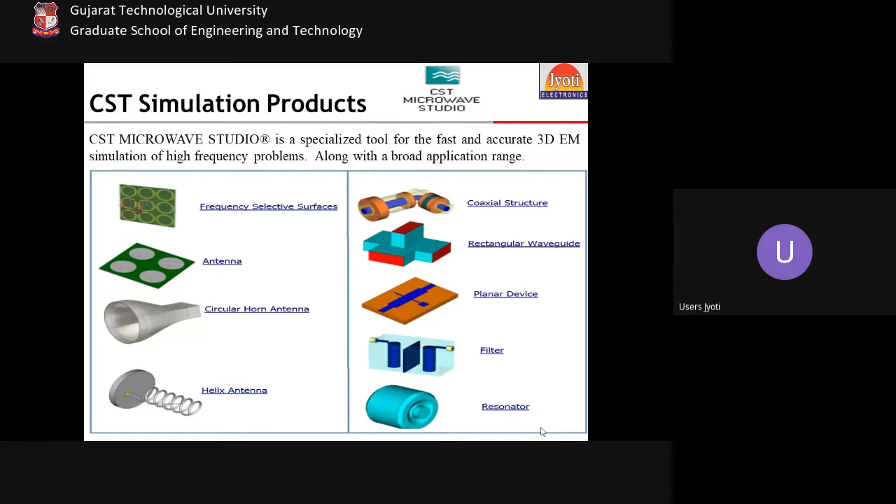So a few of the examples on the screen are designed using CST Microwave Studio. Any sort of metamaterial or frequency selective surface structures can be designed. Any sort of antennas or their arrays can be designed, either planar or non-planar. Any sort of filters, either planar or cavity-based structures, can be designed here in CST Microwave Studio. Thereafter, a few examples in terms of CST EM Studio are on the screen.

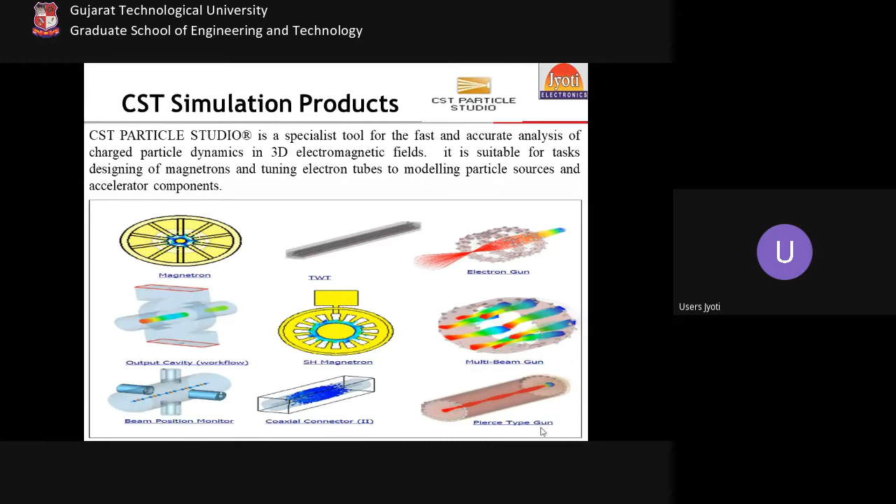Now, very few examples in terms of Particle Studio, where the interaction of EM fields with the freely moving charges is studied. Thereafter, CST MPhysics Studio, where induction cookers, combline filters, circuit breakers can be designed and analyzed. And you can also study multiple components by applying some heat sources in order to have the temperature effects on the EM fields, like you perform in biomedical engineering when you go for MRI scanning or such applications.

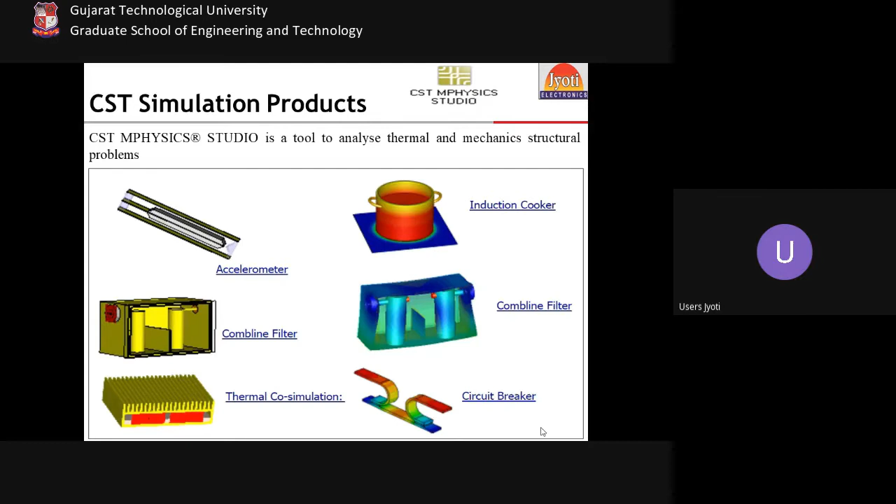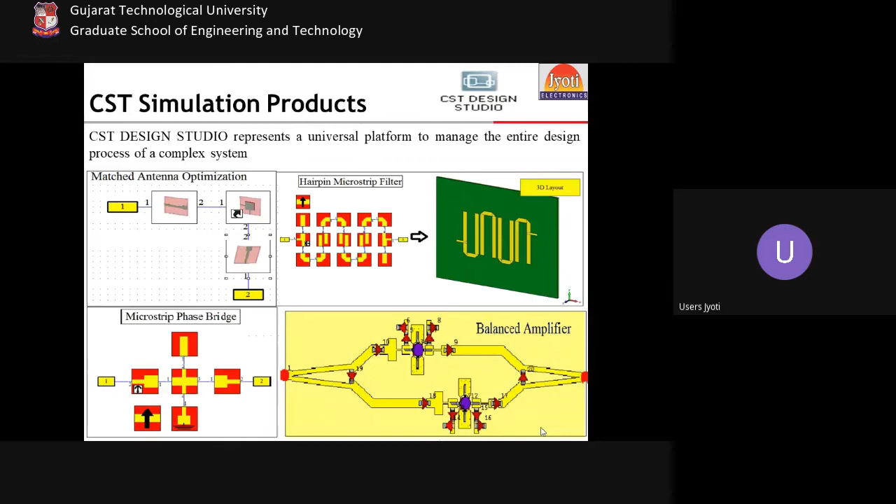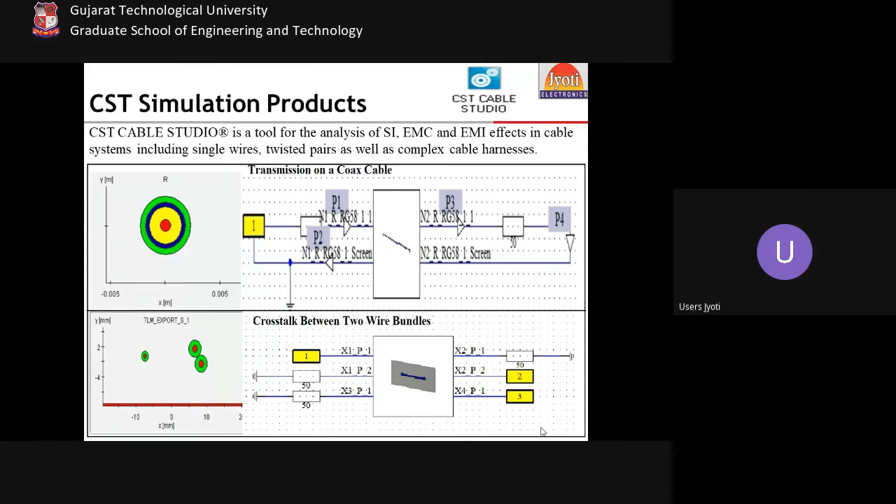You can use transient solver, you can use frequency domain solver. The results will be very similar to one another, but there are a few differences in the numerical techniques. There are a few differences in the meshing or the discretization methods. There are a few differences in terms of the advanced application areas, right?

If I talk about MIMO concepts, the name itself says multiple inputs and multiple outputs. So on the transmitting end, there would be multiple excitation ports. So it is highly recommended, in terms of the differences between transient and frequency domain solver, that while you are simulating a single input, meaning there is only a single excitation in the structure, you use the frequency domain solver. While when you are working on multiple excitations, multiple input ports, you should use the transient solver.

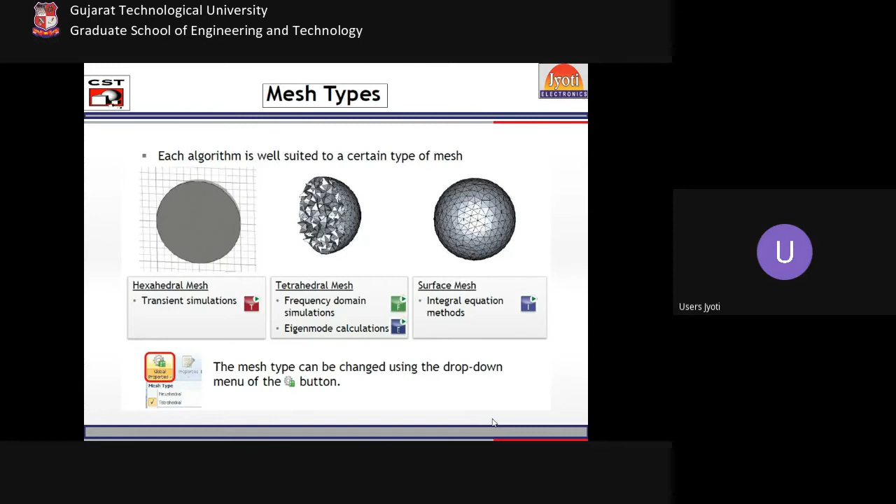So this is, I guess, quite enough for the introduction to CST. Now let me directly talk about a few designs. You all might be aware of designing antennas and the concept of antennas. So I will directly switch to one of the very important designs, which is implemented for Wi-Fi communications. In Wi-Fi routers, such antenna arrays can be utilized. I'll directly show you the design through the CST interface rather than presentation mode, because I am left with only 35 minutes. So I'll be covering a few of the designs very quickly.

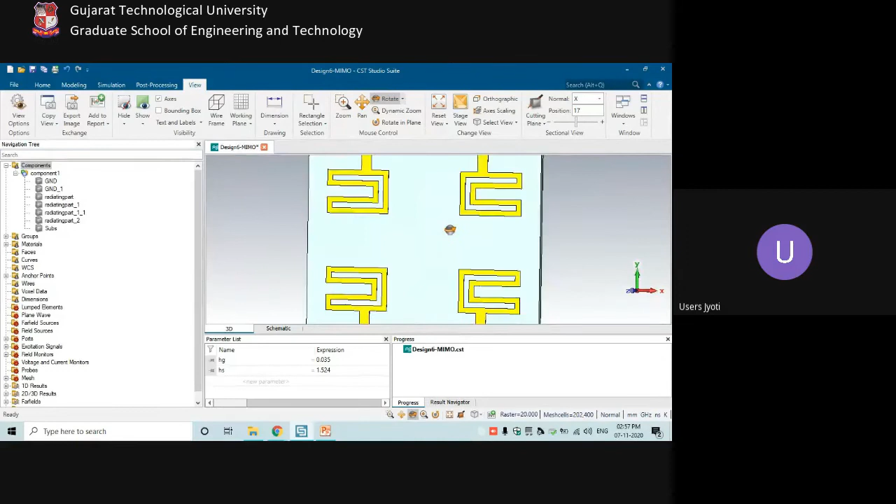Yes, so this is one of the very important intelligent designs in terms of Wi-Fi or LTE communications, where 2x2 C-shaped monopole antennas have been created. If you notice, all four antenna elements, antenna element number 1, 2, 3, and 4, are identical in nature. If you notice very closely, all the antenna elements are identical to one another. Also, the input excitations of all four antennas are identical to one another.

So for Wi-Fi communications, for 4G, for LTE communications, the prime requirement is that your antenna elements should be identical to one another. Also, the input excitations should be identical to one another in reference to the amplitude levels and the input phase shift among the antenna elements. This is the reason that this antenna structure has this sort of radiation pattern.

Also, when you talk about antenna arrays, there are two concepts. If I show you through the presentation, there are two concepts. One is the mutual coupling among the antenna elements, and second, the spacing of the antenna structure. Mutual coupling and the spacing among the antenna structures. So the size of the antenna array, how it would be compact by minimizing the spacing,

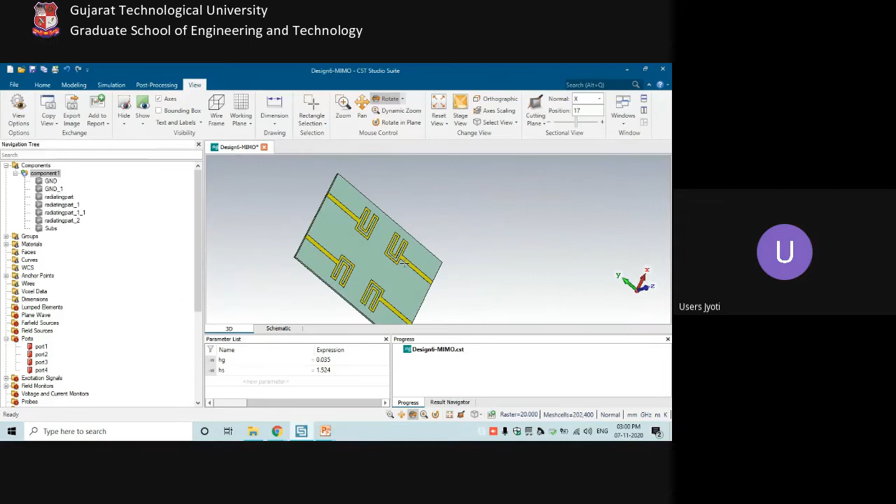So in terms of the coupling, theoretically it is said that between two antenna pairs, the mutual coupling should be below minus 12 dB at the resonating frequencies. If I show you the mutual coupling between antenna element number 1 and 2, then S21 should be below minus 12 dB. And if I show you the S21, it is well below minus 12 for almost the entire range of the frequency. So yes, mutual coupling has been maintained.

Now, between antenna element number 2 and 3, S32 should be maintained. This is S32. It is again maintained. And between antenna element number 3 and 4, S43 should be maintained. And this is your S43. It is again maintained.

Now, there is another concept if I talk about these two pairs of the antenna structures. These are element number 1 and 2, and these are element number 3 and 4. Now you notice that the orientation of these two antenna element pairs is very identical. That means the mutual coupling between antenna element number 1 and 2 and the mutual coupling between antenna element number 3 and 4 should be very identical to one another.

If I show you that concept, this is the mutual coupling between element number 1 and 2, and this is the mutual coupling between element number 3 and 4, and both are very identical. Also, I mentioned that all the antenna elements in an array for 4G, LTE or Wi-Fi communication should be very identical to one another. Their input excitations, the reflection coefficients, should also be identical. That means all the antenna elements should behave in an identical manner.

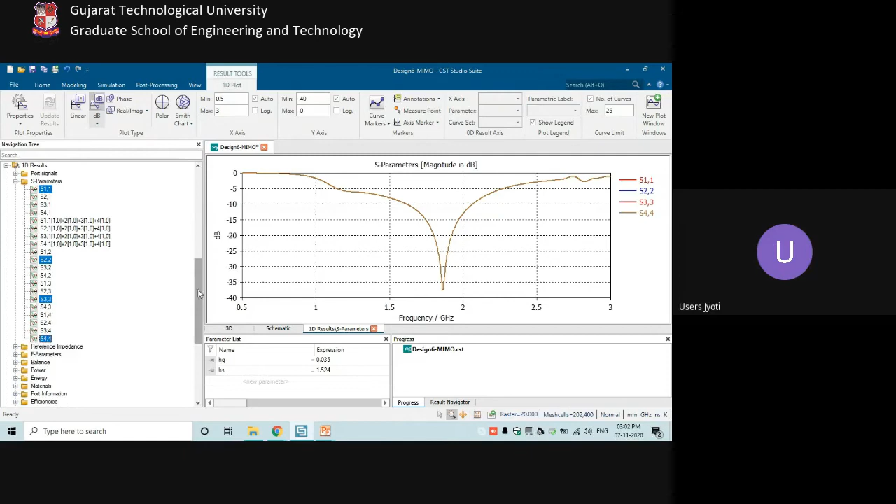So if I move further and show you the E-field distribution over all four antenna structures, you would notice that all four antenna elements are giving you the same E-field distribution.

You notice now, if I animate it, all four antenna elements are having the same E-field distribution. So this has to be there while you are working on the antenna array for 4G or for Wi-Fi or for LTE communication. But yes, the current technological era is of 5G,

and yes, China is already working, and at IIT Delhi there is a CARE unit, right? And they are working on 6G. They have set up the 6G lab. Yes, we need to fasten ourselves. We need to run fast in order to compete with the very advanced laboratories.

So let's talk very quickly over the 5G designs. If I give you the concept of 5G very quickly, this is one very intelligent PPT slide that can give you the idea of 5G. Currently, at every base station there are a few antennas, and the bandwidth of those few antennas is distributed among the multiple subscribers we have.

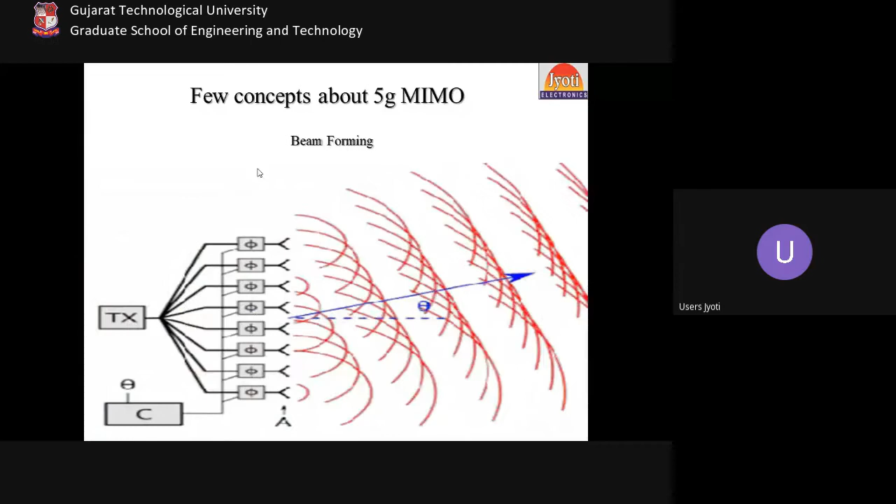So this is the concept of 5G communications, through which we get much higher data rates, much lower latencies, and much higher bandwidths. And this is the concept of beamforming: if I show you this design again, these 4 antenna elements were there.

All antenna elements were radiating in different directions. If I show you, just give me a minute. This was the radiation pattern of antenna element number 1. This was the radiation pattern of antenna element number 2. This was the radiation pattern of antenna element number 3. And this was the radiation pattern of antenna element number 4. All the antenna elements were radiating in different directions.

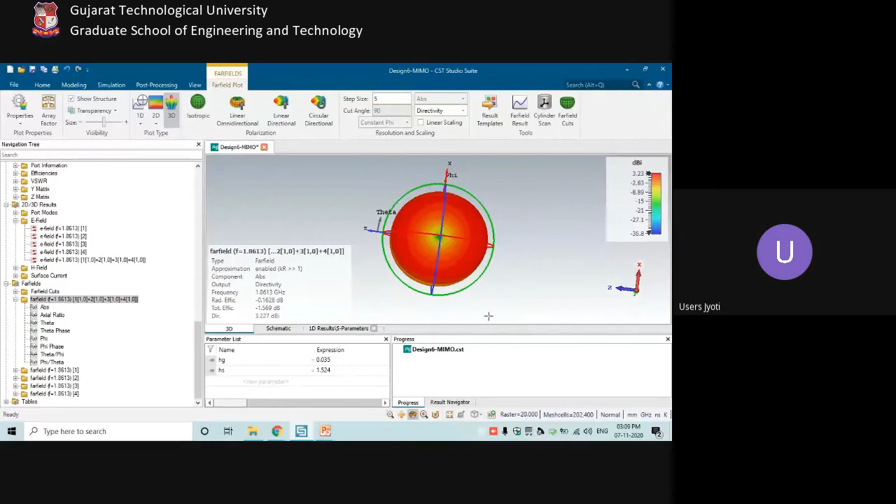But when you combine the impact of 4 radiations, when you combine the performance of 4 antenna elements, then the complete 360 directional behavior should be there. This was the concept of 4G. Now, what is there in 5G? That a beam should be formed into a particular direction with much higher directivity. So if I show you that particular concept through another design of mine,

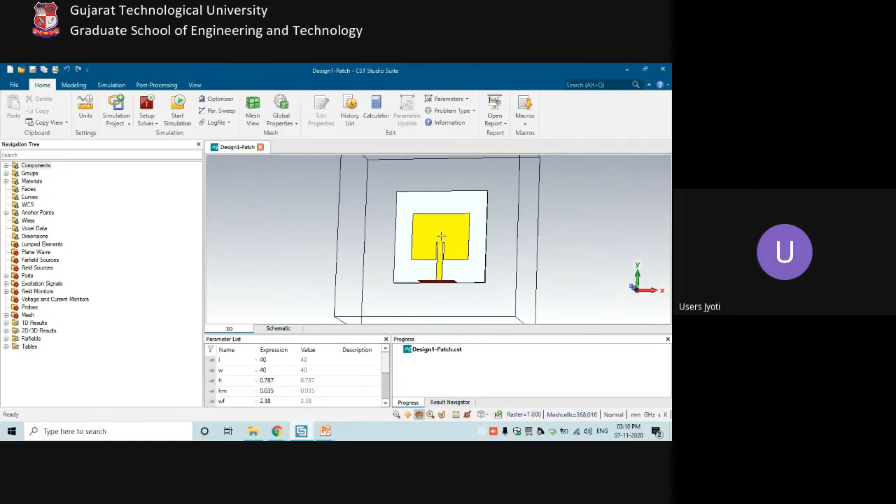so if you are noticing, this is a very basic patch antenna, right? And its performance is somehow like this. That means this is its 3D radiation pattern. If I show you it in polar, and if I notice its direction of main lobe, then its main lobe magnitude is 7.61 dBi, while its main lobe direction is 0 degrees.

Now, if I convert this single antenna element into an array of antenna structures, let's do this. I activate the far field array properties. I enter that in X direction there should be 2 antenna elements, in Y direction there should be 2 antenna elements. The spacing between the antenna elements in X and Y should be 40-40, and the phase shift, let's say it's 0. Update it, click OK. Then you see the main lobe magnitude is increased by a value of, I guess, 6.29. That means the current main lobe magnitude is 13.8 and the 3D radiation pattern is somehow like this.

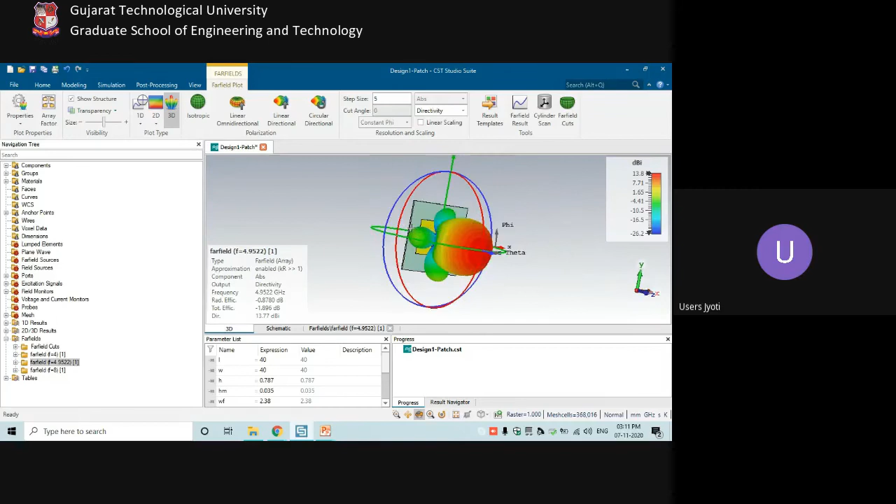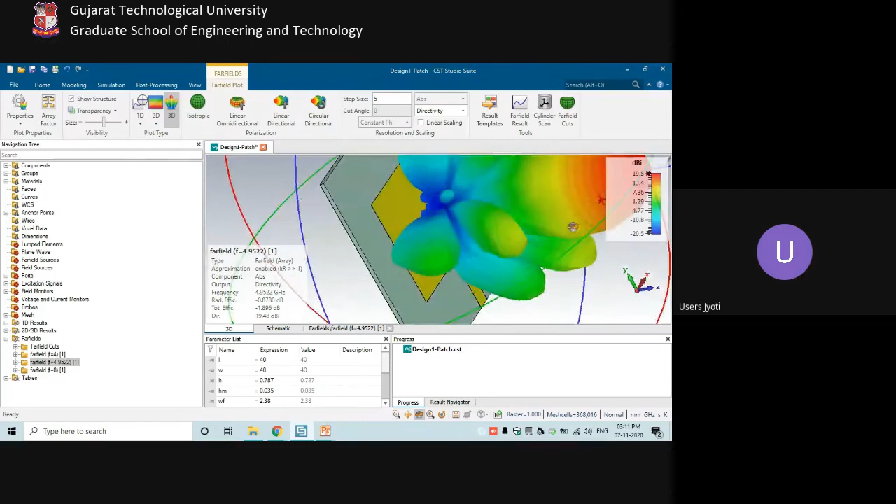This is the main lobe. The reddish one is the main lobe with this much of directivity, while the rest are the side lobes or the back lobes. Right? Now, if I increase the number of elements, let's say 4 in X and 4 in Y, update, okay, the energy is much more precise. The beam is much more focused now. The energy is 19.5 dBi in terms of directivity, while there are many more side lobes and back lobes, but yes, the main lobe energy has been increased from 7.69 dBi.

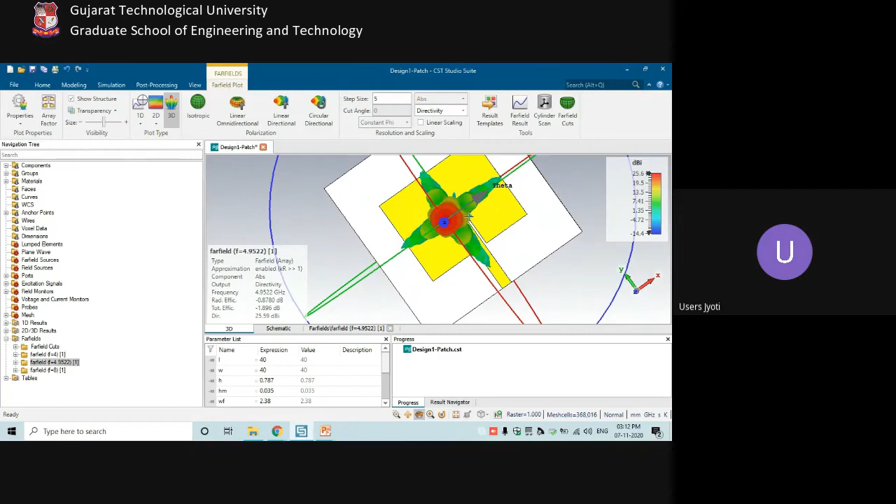We have come to 19.5 dBi, and if I increase it more, if I make it 8 cross 8, the energy is now 25.6 dBi. 25.6 dBi directivity is there due to the presence of an 8 cross 8 antenna array. Right? And now, if I start tilting this beam, this can be done by the variation of phases. So if you notice, the main lobe direction is still 0 degrees.

So now my task is to steer the beam in order to introduce the concept of beam steering. So if I give an input phase shift of 30 in X direction, 30 in Y direction, that means every individual antenna element is having this phase shift of 30 degrees in X and 30 degrees in Y, and the cumulative phase shift in each antenna element would be like this. Antenna element number 1 is having a phase shift of minus 210 degrees, minus 180, minus 150, minus 120, minus 90. That means a sequential phase shift of 30 degrees is there.

And if I apply it, then you see your main lobe direction is tilted to 7 degrees now. This is called beam steering. So this beam steering that I have just demonstrated, I can demonstrate one more case. I can make it 60 degrees now. And you see your main lobe direction is 14 degrees this time. So this was the case where the whole performance of the 8 cross 8 antenna structure has been tilted.

So this particular concept has to be implemented for each and every individual antenna element. Right? Each and every individual antenna element should possess this property. That means antenna element number 1 should radiate in X, antenna element number 2 should radiate in X minus 3, X minus 6, X minus 9, X minus 12, likewise, or whatever the directions. Right? So this could be done in one of the ways. If I show you one design,

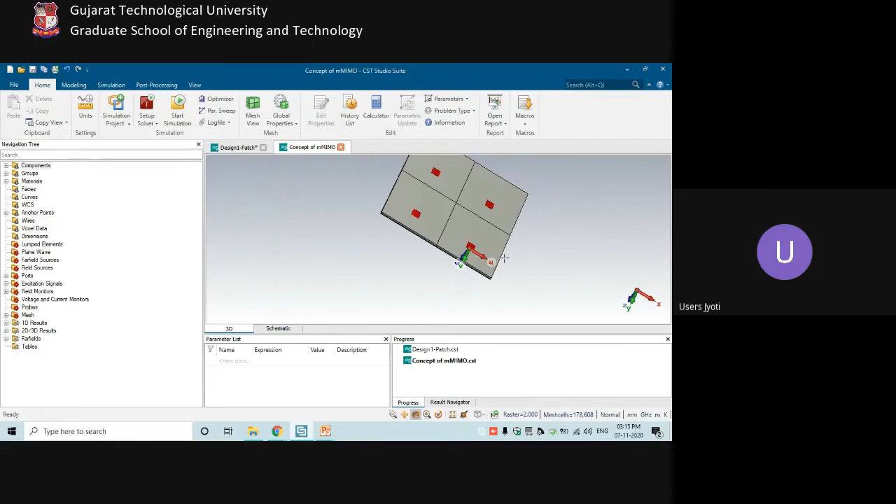So it is not possible to test your designed antenna array. I'll come to this; this is one of the practical cases actually. If I increase the order of the antenna array, the practicality would not be there. What could replace that, I will discuss in the next 5 minutes. But meanwhile, let me talk about this particular antenna array of 2 by 2 circular patch antennas.

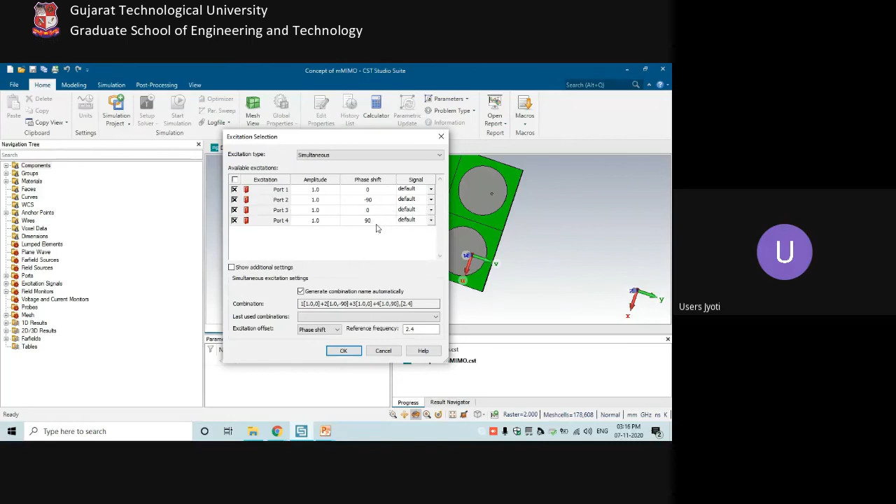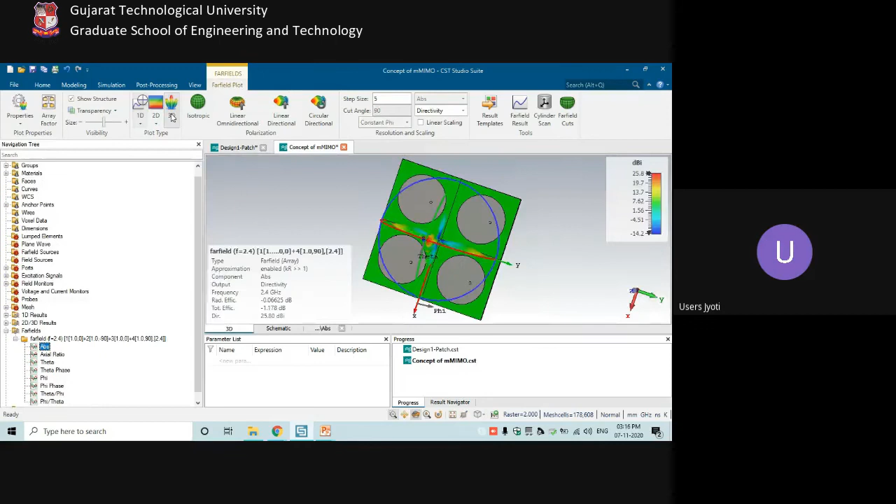In these patch antennas, I have given a phase shift of minus 90 degrees in port number 2 and a phase shift of 90 degrees in port number 4. And if I show you the performance of this antenna array, you would be glad to know the performance is much better. This is the performance of the 2x2 antenna array in 3D. You see, a very focused, very fine, very thin beam is here with a directivity of 25.8 dBi.

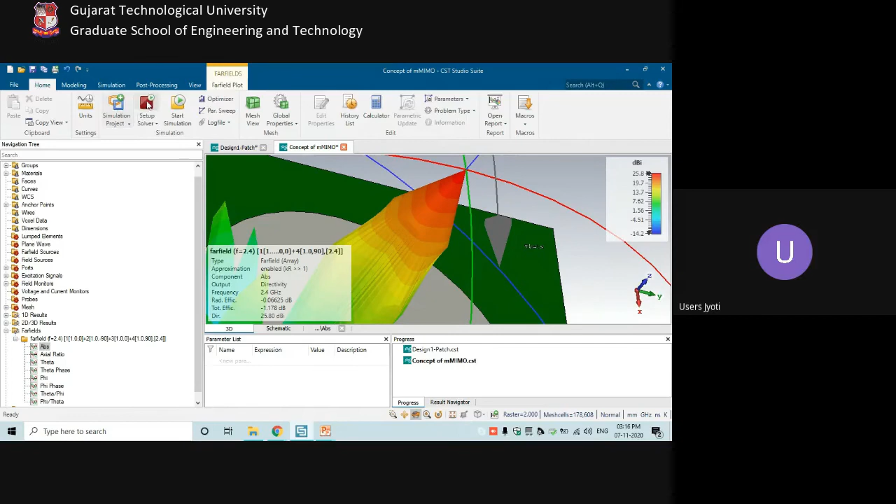In rectangular patches, I had a directivity of 25.6 dBi with 8x8, meaning 64 antenna elements. While in circular patch antennas, there is only a 2x2 arrangement, and the directivity is this high. This is only because I have introduced phase concepts in the individual excitations. You can play with these phase variations as per your requirement. This is just a case study for you guys.

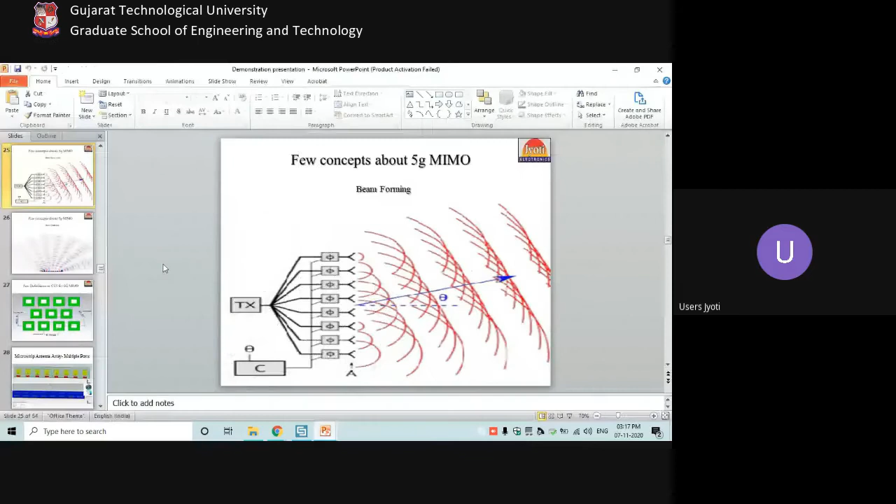Now, since I'm left with only 10 minutes and I need to go into Q&A as well, I will give you the final design of the day that is more practical in nature. This is the design where 64 rectangular patches have been created. An 8x8 antenna array is here, and this is the input excitation. If I show you the design exactly, I guess this is not in this part.

So this is the design, which is more practical in nature, where 64 antenna elements are all fed with a single unit excitation for this 8x8 antenna structure. I request you to please have some patience; these designs are quite heavy. So this is the 8x8 antenna array, and this is your input excitation given to this microstrip line, and the power has been distributed into different branches.

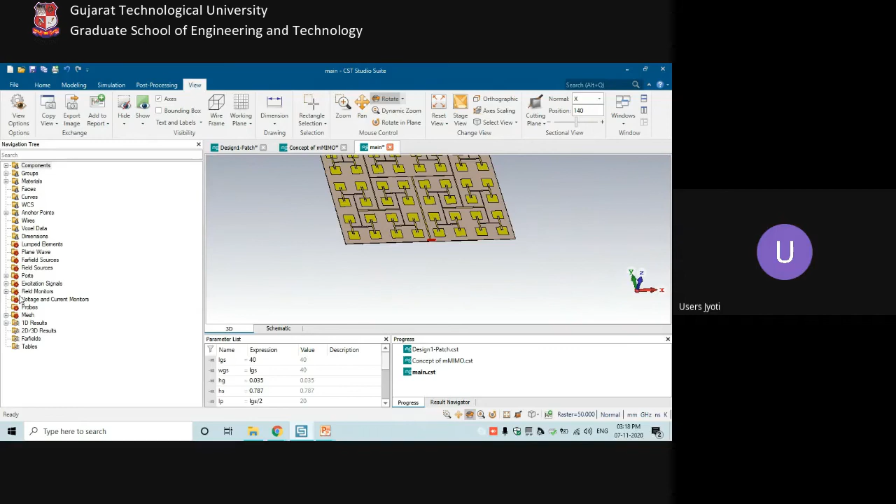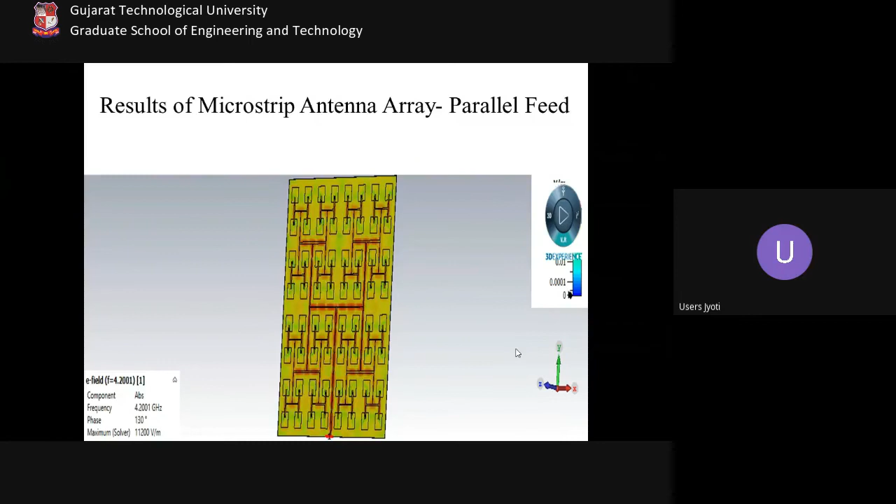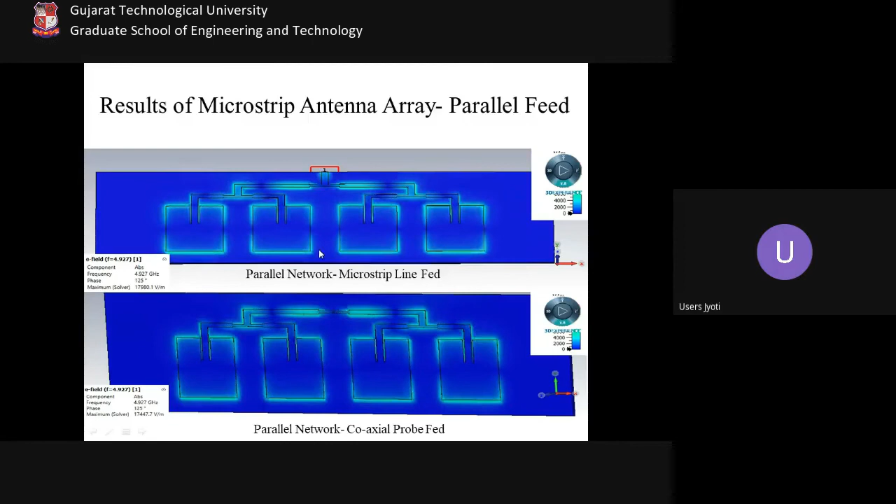If I show you a few more designs directly, these designs give you the comparison with coaxial probing. The lower design is fed through coaxial probing, and the upper design is fed through the inset feed, or microstrip line feed. And if you see the comparison, both are more or less identical to one another.

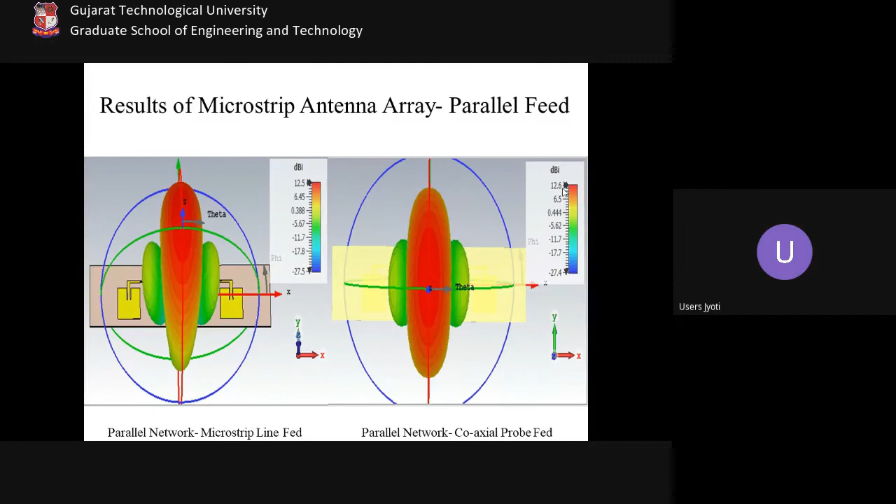And this justifies that this is through the microstrip line feed. The directivity is 12.5 dBi. This is the coaxial probe feed, and the directivity is 12.6 dBi. So more or less, both feeding mechanisms give you nearly the same performance, right?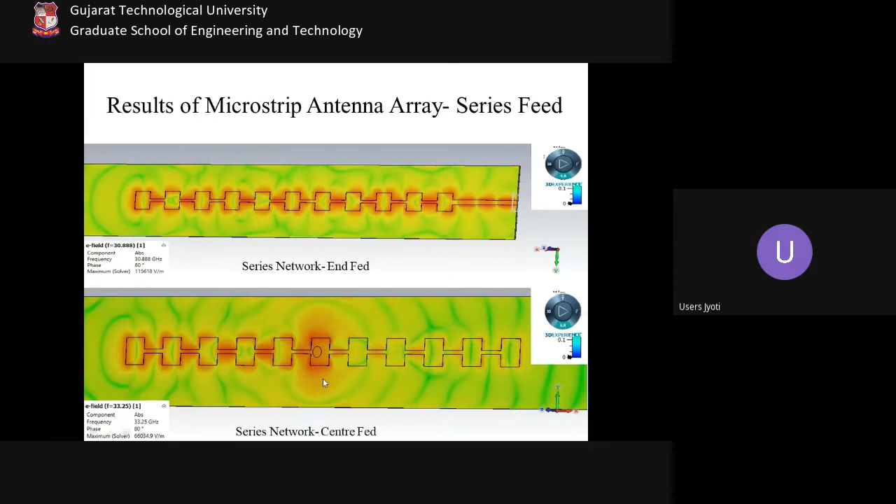And this is one of the cases where 11 rectangular patches have been used with connecting lines among themselves. This linear antenna array of 1 cross 11 antenna elements has been fed through end feeding, where one of the ends has been fed, while this is the center feeding of the network. This is a series network, and the center element has been fed, and you see the performance of these two antenna arrays, right?